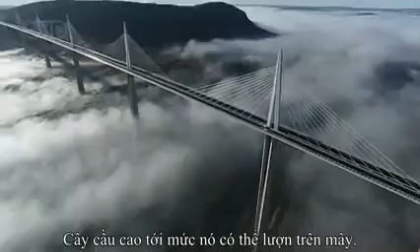This is the Millau Viaduct, the tallest bridge in the world. Its highest tower stretches a staggering 343 meters. So high, the bridge glides above the clouds. But this is a megastructure they said couldn't be built. When I've shown first the drawing of this bridge, they really thought I was crazy.

The team attempting to build this amazing freeway in the sky had to survive landslides, fight winds gusting at 130 kilometers an hour, and weather massive storms as the bridge simply hung in the balance. It's a bridge that pushes the boundaries of engineering to the limits, and then beyond.

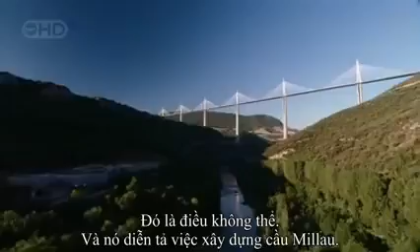Imagine building a series of Eiffel Towers, then slinging a 4-lane highway between them, all the way across one of the deepest valleys in France. Impossible though it sounds, that pretty much describes the building of the Millau Viaduct.

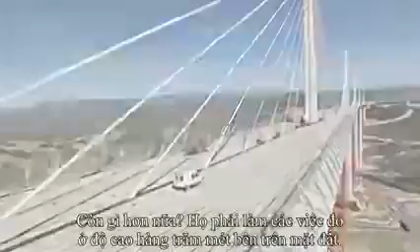From the start, the construction team faced 3 daunting challenges. 1. Build the tallest bridge piers in the world. 2. Put a 36,000-ton freeway on top of them. And 3. Erect 7 steel pylons, each weighing 700 tons. And what's more, they had to do this hundreds of meters above solid ground. So high that if you were on top of the Eiffel Tower, you'd still be looking up at this awesome bridge.

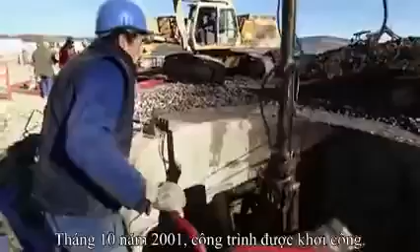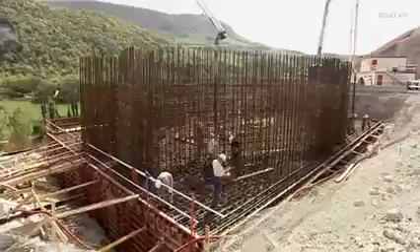October 2001, the team break ground. They're required to build a bridge that'll last for 120 years. And to win the contract, the teams promised to build it in record time, less than 4 years. By comparison, the world's longest suspension bridge, the Akashi Kaikyo in Japan, took a full 10 years to build. To up the ante, any delay will cost them $30,000 a day in penalties.

There are 7 piers that are numbered from the northern end of the valley. Number 1 will pose problems because of the steep slope. Number 2 will be the biggest challenge since it's the tallest. Crossing the river, number 3 is not much shorter. Then 4, 5, 6, and 7 climb the gentler slope to the south.

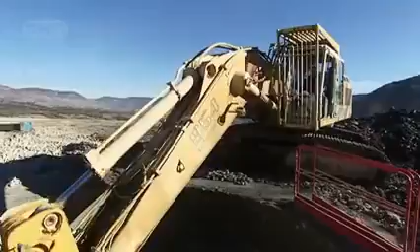To begin, the team had to bury the foundations deep in the bedrock in order to support the enormous weight the bridge will place on them. But the forces of nature were stacked against them. Geologists have warned of the risks posed by the region's fractured limestone. The rock is full of cavities that are essential to the local cheese economy. These cave systems, close to Millau, are home to a unique bacteria responsible for the blue mold in the world-famous Roquefort cheese. But what's perfect for cheese could be disastrous for a megastructure.

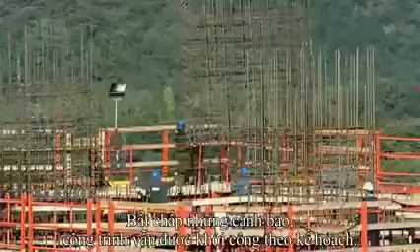The geologist's diagnosis spelt one thing: landslides. This kind of catastrophe could jeopardize the entire project. Despite the warnings, building went ahead as planned. Then, well into construction, as predicted, a dramatic storm causes a landslide. 4,000 cubic meters of rock collapse around Pier 1. Fortunately, the fallen rock doesn't damage the pier, but the warning is clear. They're forced to divert precious manpower and equipment to stabilize the slope and prevent a repeat collapse.

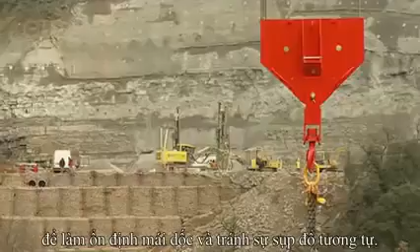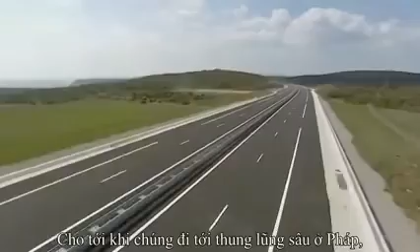So if the area is prone to landslides, why did they build the world's tallest bridge here in the first place? The answer is simple. In the 1980s, France built a freeway linking Paris directly with Spain. This major artery headed south across the French countryside, while from the Mediterranean, the freeway headed north, until they both hit one of the deepest valleys in France and stopped dead. Welcome to Millau, France's least favorite bottleneck.

The town of Millau is in the mountainous region of the Massif Central, one of the most tranquil parts of France. But in summer, this poor medieval town suffered traffic hell. The locals couldn't take it anymore. Neither could their mayor. It was terrible for our reputation. When you hear every day on the television and radio, avoid Millau, there's a traffic backup, a 5-hour wait in Millau.

And it's not just the people of Millau. Two drivers, Jamila and Jemima, crossing the 30-odd kilometers between the freeway on either side of Millau, reveal exactly why this bridge is needed. Jamila, in car 33, will cross the new bridge, while in car 22, Jemima will take the old road across the valley floor.

Getting straight on the freeway, car 33 approaches the Millau Bridge after just 18 minutes. The only delay is the 30 seconds it takes to get through the toll booth. Then driving at 100 kilometers an hour over the spectacular bridge, she takes just 32 minutes to get to the other side. Car 22, meanwhile, is just beginning the crawl through the medieval streets of Millau. Cyclists, pedestrians, people with dogs all need to be negotiated.

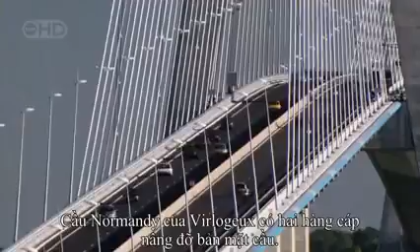Virlogeux's Normandy Bridge has 2 sets of cables supporting the deck. But he wanted to up the stakes for Millau by losing 1 row of cables, so the remaining line would be forced to do twice the work. More dramatically, the 2.5-kilometer Millau Bridge, instead of having a single main span, needed a whole series of piers to support it across the valley. No bridge builders had ever attempted a multiple-span, single-line cable-stay bridge on this scale before.

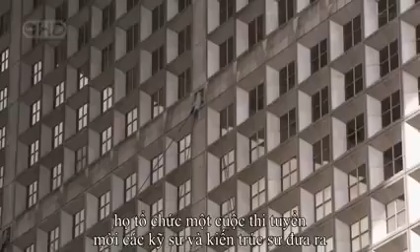The French authorities had a problem. Nervous about Virlogeux's groundbreaking scheme, they held a competition inviting other engineers and architects to compete with different designs. The winner, Lord Norman Foster, is one of the world's superstar architects. In Hong Kong, he built the world's largest airport terminal. In Barcelona, offices literally hang from a mast on his communications tower. This is a man who regularly contemplates the impossible and delivers.

You know, it's the challenges, and it's one challenge on top of another, on top of another. And with Millau, one of the biggest challenges was making it fit into the landscape, given it's just down the road from the famous Gorge du Tarn, France's equivalent of the Grand Canyon. How do you make something which has to be so immensely strong against the forces of nature look very gentle, very delicate? How do you weave something on that scale into the most unbelievable landscape?

Ironically, Foster's answer was to take Virlogeux's pioneering scheme, then push it one stage further. He turned an elegant piece of engineering into a delicate work of art by boldly cutting out 2 of the 9 original piers and seriously slimming down the remaining piers and road deck. Foster wanted the bridge to appear as delicate as a butterfly, but this butterfly has to support the weight of 5 Eiffel Towers in gale-force winds hundreds of meters above the River Tarn. Getting the design wrong would be a disaster.

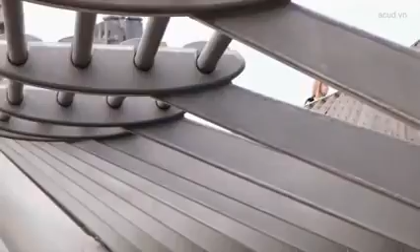Then, with Millau still on the drawing board, Foster's record as a bridge builder suffered a major setback. His Millennium Bridge in London is actually another record-breaking structure, the lowest profile suspension bridge in the world. But when this footbridge opened to the public in June 2000, it was a public relations disaster. Crowds walking over it set up a resonant frequency, and the bridge began to sway. As people adjusted their step to the small initial wobble, the effect was magnified.

Though it didn't threaten the structure, the swinging motion became so dramatic, the authorities closed the bridge for a refit that took 1.5 years and ended up costing over $8 million. It was a bad omen for the Millau Bridge, where construction was soon to begin. And at 15 times the height, a design flaw would be a catastrophe.

December 2001, France's Millau Viaduct, the tallest bridge in the world, is under construction. Everything about this project is supersized. It'll need 200,000 tons of concrete, so much that the team have to build a concrete factory on site. But there's nothing straightforward about this concrete. The formula must be just right.

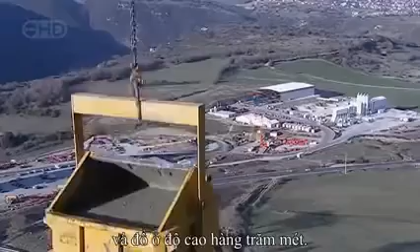It needs structural strength to support the massive loads it'll have to bear. But it can't set too quickly, as it has to be hoisted into position and poured hundreds of meters in the air. And it needs to be just the right color to suit Norman Foster's vision. In fact, the architect's vision has created a headache for the construction team. He's designed each pier as a complicated geometric shape, tapering the entire way up with vertical grooves set into them to create shadows. But what's just a line on paper for the architect was a major challenge to build.

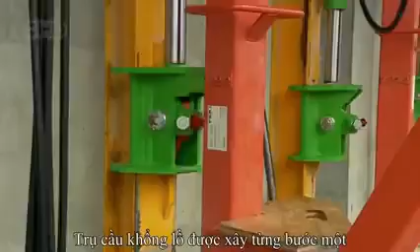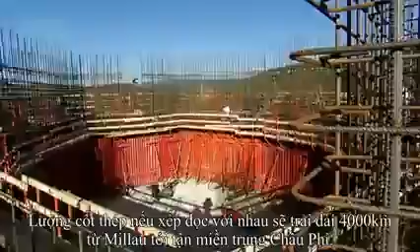The enormous piers are built step by step by pouring concrete into a temporary mold. To give the required strength, the molds are filled with a frame of steel reinforcing bars. In total, 16,000 tons of these steel bars are hoisted into place and secured. Laid end to end, they'd stretch the 4,000 kilometers from Millau all the way to Central Africa.

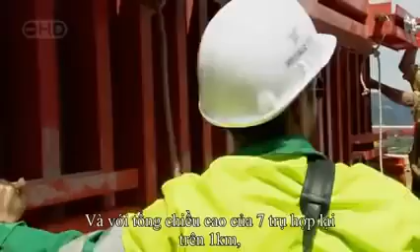The shape of each pier is seriously complicated. As a result, each time they remove the sections of red steel shuttering, they have to change the shape of the mold to fit the profile of the next 4-meter section. Manhandling these steel panels weighing up to 15 tons apiece is no picnic. And with the combined height of the 7 piers totaling well over 1 kilometer, they have to change the shape of the mold over 250 times.

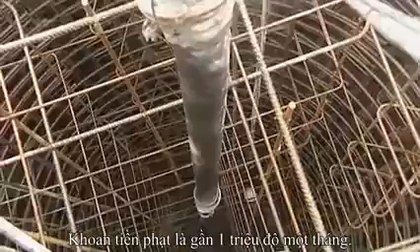Every 3 days, each team on each pier went through this whole cycle. Then they repeated the process. But it was a race against time, with a permanent threat of delay. Keeping the entire build on time and to budget was the daunting responsibility of one man, Jean-Pierre Martin. If instead of 3 days we took 4, imagine that multiplied by the number of castings. We'd end up with a 3 or 6 month delay. With a penalty of nearly $1 million a month, this isn't something Martin wanted to contemplate.

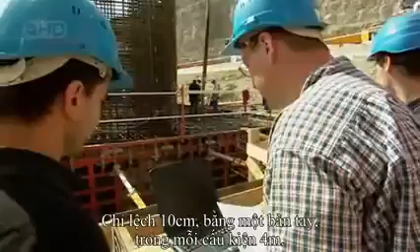And this schedule wasn't his only headache. You have to be pinpoint accurate when you're building the tallest bridge piers in the world. Get it wrong, and the bridge simply won't fit together. Just 10 centimeters out, about a hand's width on each 4-meter section, and the tallest pier could be 6 meters off at the top, the width of a jumbo jet fuselage. Each team was aiming for a specific point in the sky. For Pier 2, this was exactly 245 meters above the ground, 546 meters from the north side, and 1,914 meters from the southern end. There was no room for error.

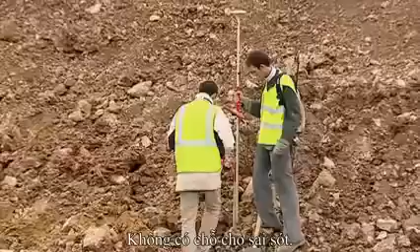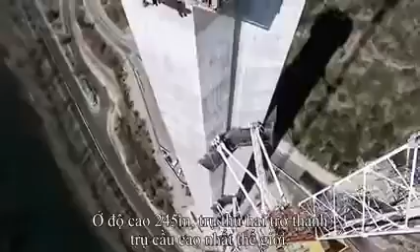The only chance they had to get it right was with GPS, accurate to within 4 millimeters. Using signals from multiple satellites, the team could pinpoint their position and make sure they're on target for that critical point in the sky they needed to hit. Month after month, the piers climbed higher. Finally, by November 2003, they reached their full height. At 245 meters, Pier 2 becomes the highest bridge pier in the world. But is this record-breaking pillar where it's supposed to be? Amazingly, it's dead on target, to within 2 centimeters.

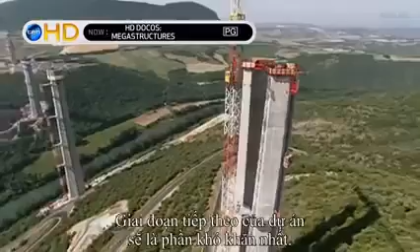Champagne corks pop. It's time for a major celebration. Against all the odds, they were 1 month ahead of schedule, but the team couldn't afford to relax. The next stage of the project would be the most difficult part of the build. Phase 2 of building the world's tallest bridge involved putting a 2.5-kilometer roadway weighing 36,000 tons on top of the piers, a full 270 meters above the River Tarn.

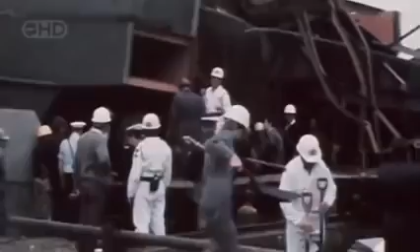Bridge builders know danger comes with the territory, but working at these heights can be lethal. More than 34 died constructing New York's Brooklyn Bridge. 35 died in 1970 on the Westgate Bridge in Melbourne, Australia. And 1 year later, 13 workers were killed when the Koblenz Bridge in Germany collapsed into the Rhine. With these fatalities in mind, the team decided to fabricate the entire road deck on the safety of solid ground. This meant building it in steel, which in theory would be much safer than lifting vast concrete sections hundreds of meters into position.

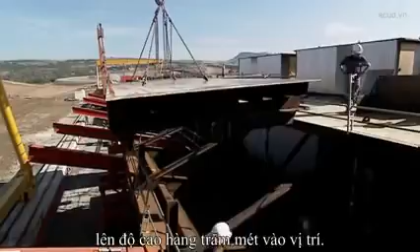There's only one problem with this plan. No one had ever put a road deck on piers anything like this height before, let alone over a 2.5-kilometer span. In the end, only one steel manufacturer had the courage to take on this colossal challenge. Eiffel, the steel firm set up by the great French engineer. Eiffel built what was once the tallest bridge in the world, the Garabit Viaduct in southern France, before getting round to the framing for New York's Statue of Liberty and, of course, his signature tower in Paris.

But despite the company's experience, Eiffel's director, Marc Buonomo, knew he was taking a serious risk. It was a gamble for the company, because if there had been a mistake, if it hadn't worked, it would have been the whole company.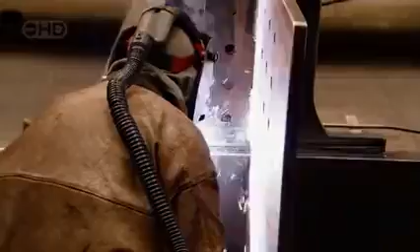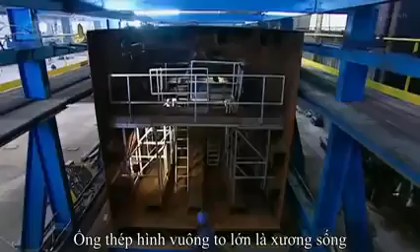They fabricated the massive sections that would make up the road deck in the company's steel factories. This immense jigsaw puzzle involved manufacturing 2,200 separate sections, weighing up to 90 tons and some of them 22 meters long. Their accuracy is measured with a laser to within a fraction of a millimeter. The huge square tubes are the central spine that should make the deck rigid. The triangular side panels will be welded on either side to create the width for a 4-lane highway.

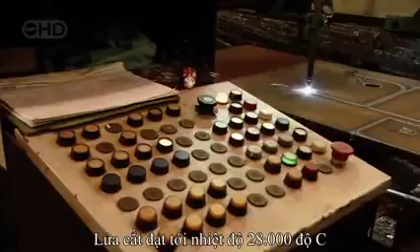To meet the punishing schedule, Buonomo automated the manufacturing with a 2-headed welding robot and a plasma cutting machine. Each cutting pattern or template is programmed into the computer. Then the machine automatically blazes its way through the steel. The torch reaches a scorching 28,000 degrees centigrade. That's 5 times the temperature of the Earth's inner core.

But cutting and welding was the easy part. The hard part was getting these monster sections the hundreds of kilometers from the factories to Millau. The routes had to be planned with precision to avoid major damage. The police coordinated safety and clearances. Even with that level of preparation, some obstacles felt as if they're cutting it just too close for comfort. And this was no one-off event. To build the viaduct took over 2,000 of these extraordinary road convoys.

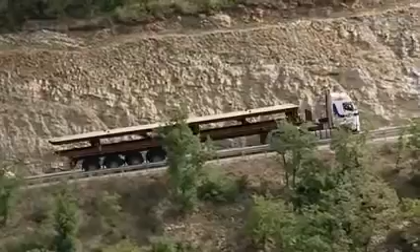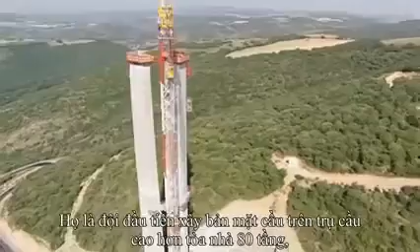The components arrived at assembly plants set up, one on either side of the valley. Here, the pieces of the massive jigsaw puzzle were welded together to form the 2 halves of the deck. But getting these 2 halves to span the valley on top of the world's tallest bridge piers would be a major challenge. They'd be the first team to put a road deck on a pier taller than an 80-story skyscraper.

And pushing bridge building beyond anything attempted before, they planned to slide the entire 2.5-kilometer road deck over in 2 colossal pieces. The bridge's chief engineer, Jean-Marie Cremer, was one of the few people who believed it could be done. All the engineers who know this method, who were in the know, didn't believe it was possible. If the team had got their calculations wrong, the entire structure could collapse into the valley.

We found a solution for the construction, which was to launch the bridge from the 2 sides. One part on the Larzac Plateau, one on the Rouge Plateau. And to push them from the 2 sides and to make them come and meet here above the river Tarn. Smaller bridges use a similar technique. A powerful set of hydraulic rams literally pumps the deck from one side to the other. But Millau would be the longest launch ever attempted over the highest piers in the world, and the results could spell disaster.

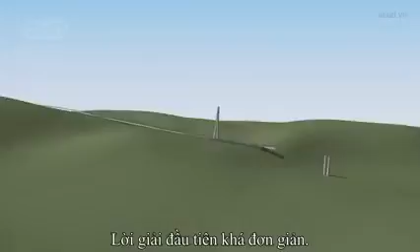The deck is so slender, it would bend and collapse if it were pushed out over the 342-meter spans between each pier. The furthest anyone's previously managed is less than half that distance. The first part of the solution was simple. Fit a pylon so its cables support the front of the deck as it goes out over the valley. Then construct temporary steel support towers that halve the spans to a more manageable 171 meters.

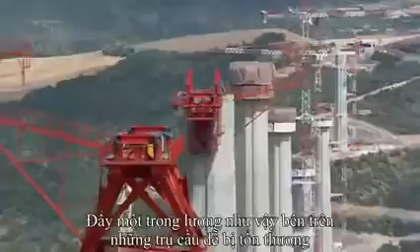These steel towers were a construction feat in themselves. The largest, over 170 meters high, is the tallest ever built, and they needed to carry a massive load: 7,000 tons as the leading edge of the deck, together with the first 90-meter pylon, slide over. And simply pushing this enormous weight over the top of the vulnerable piers would bring them crashing to the ground. This was the nightmare scenario. If we'd done a conventional launch, we would have knocked the piers over like the pins in a bowling alley.

Someone needed to reinvent the way this type of bridge is built. And it's Marc Buonomo with Jean-Marie Cremer who came up with the breakthrough. The basic principle can be demonstrated with a heavy box and a wobbly table.

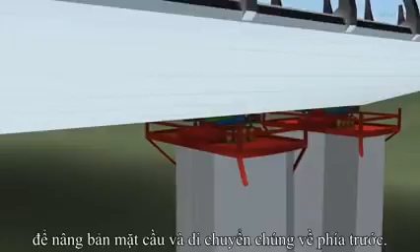The idea is to install a launching system on top of the pier, and that way, if I push the deck, it has no effect on the stability of the piers, and the piers won't fall over. The trick is to use a series of these launching systems to jack up the deck and inch it forward.

Each system uses two wedge-shaped blocks under each side of the deck. The upper wedge is pulled forward by a hydraulic ram. It slides up the slope of the lower wedge at the same time, lifting the deck from its supports and advancing it 600 millimeters. The lower wedge then retracts, dropping the deck onto its supports. The upper wedge returns to its original position, and the whole cycle begins again.

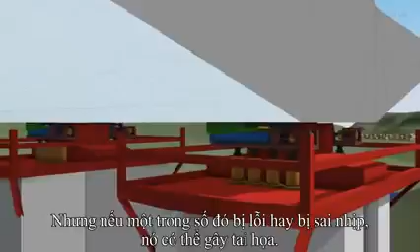4 of these clever devices are placed on each pier, all programmed to work at exactly the same time. The result is that together, they pick up the entire roadway and shunt it forward. But if one fails or gets out of step, it could spell disaster. The force could push the bridge piers apart till they collapse.

When you're up there and you see Millau 300 meters below you, you ask yourself, was this a good idea? The future of the entire project was now hanging on a prototype, and it had never been tested.

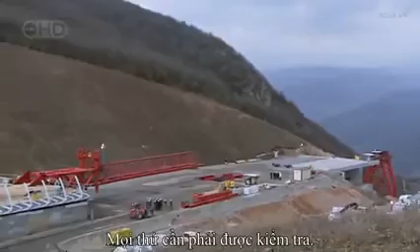It's the morning of February 26, 2003. Do or die day for the world's tallest bridge. Everything is about to be put to the test. The flexibility of the deck, the strength of the temporary piers, and critically, the pioneering hydraulic ram system. Even Buonomo, the man in charge of the launch, had his doubts.

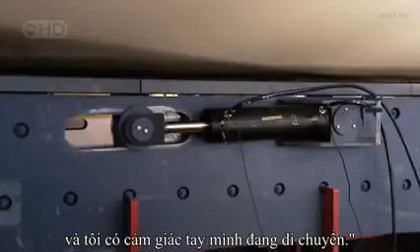The moment I heard the motors start, I put my finger on the deck, and I could feel my finger move. Every 4 minutes, the deck advanced 600 millimeters across the valley. Surveyors tracked its progress. But it was still a nail-biting time as they watched the unsupported deck crossing the void.

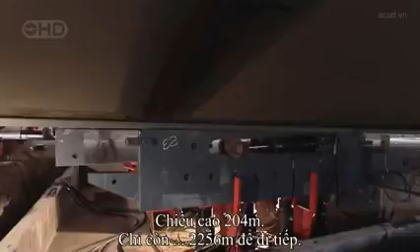Eventually, the deck reached the safety of the first pier. 204 meters down, only 2,256 to go. The launching system seemed to be working as planned. The engineers were feeling optimistic. But as the deck advances into space, it'll become more vulnerable to the wind, which can reach 130 kilometers an hour.

Unfortunately, the road deck has the shape of an upside-down airplane wing, and the team's greatest fear is that this wing could simply take off. The engineers kept a close eye on the wind and weather conditions. When they were satisfied there was a 3-day weather window and the wind wouldn't exceed 85 kilometers an hour, they'd give the construction team the go-ahead, and the deck launch could continue.

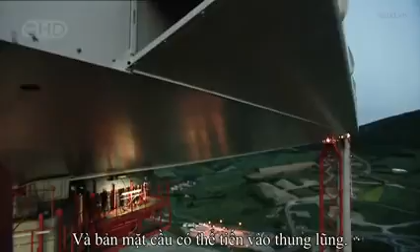The reason for this precaution is simple. Strong winds can literally tear a bridge apart. In 1940, Washington State built a suspension bridge across the Tacoma Narrows in the US Northwest. It opened with a grand ceremony on July the 1st. But the celebrations were short-lived. The bridge had a major problem: the wind.

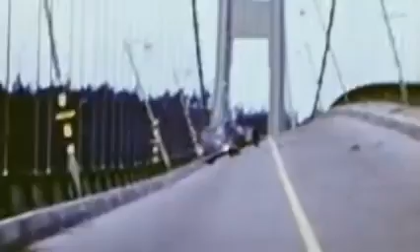Girders beneath the deck, designed to make the bridge rigid, actually blocked the wind, causing the roadway to ripple alarmingly. Locals soon dubbed it Galloping Gertie. On the 7th of November, with the wind less than 70 kilometers an hour, the bridge begins to twist violently. At 11 a.m., time runs out for Galloping Gertie. The wind sends the bridge crashing into the river.

Wind tunnel testing is now standard procedure as a direct result of Galloping Gertie. For the Millau Bridge, they analysed the wind in the Tarn Valley over 18 months, then recreated those conditions in the wind tunnel. Wind engineer Olivier Flamand was shocked by the results. The average wind speed was relatively low, but because there's such strong turbulence, it created very fast peak winds.

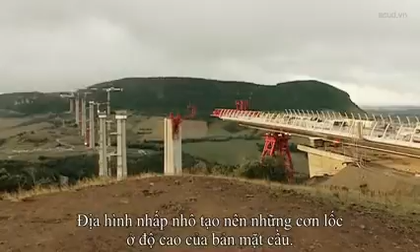The rugged terrain creates serious turbulence at the height of the road deck. Winds peak at 130 kilometers per hour. That's hurricane force. They tested every aspect of the bridge to analyze the risks: piers, pylons, and critically the deck. But it's not just the aerodynamics of the finished bridge. They needed to find out how it would behave when it was most at risk, during the launching of the deck.

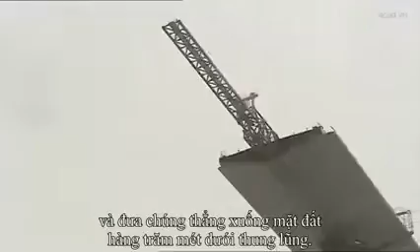Olivier and his team reached a chilling conclusion. The winds they've measured are strong enough to blow the unsecured deck off its supports and send it crashing hundreds of feet to the valley floor. And then the nightmare began. On the 22nd of August 2003, 6 months into the deck launch, one of the launch systems failed, leaving the deck hanging in the wind. To make matters worse, the weathermen were predicting storms.

So far, these massive pumping machines had worked perfectly. But the fact is they were prototypes, and due to the frantic schedule, they'd never been tested. The problem was that the non-stick Teflon between the sliding surfaces had ripped, and the friction generated was too much for the hydraulic rams to push against. Unfortunately, no one had planned on replacing parts of this monster machine mid-launch on the top of a massive concrete pillar. This was very bad news for the man who staked his reputation on this system.

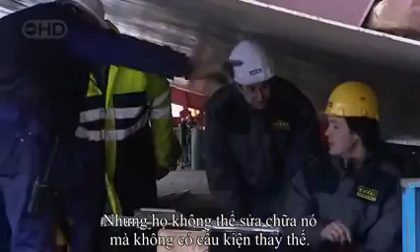Re-examining their calculations, they realized the cause of the problem. They'd underestimated the forces between sliding surfaces, but they wouldn't be able to repair it without the necessary spare parts. The clock was ticking, and Marc Buonomo needed a solution fast. When Apollo 13 came back with that incident, the NASA engineers requested they did the inventory of everything there was on board to know how to fix it.

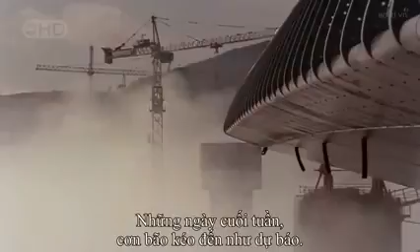That weekend, the predicted storms arrived, and another set of launching machines wore out. So when the deck finally made it to the safety of the next pier, the team breathed a major sigh of relief. You don't forget that. I won't forget that for 4 hours I was really scared.

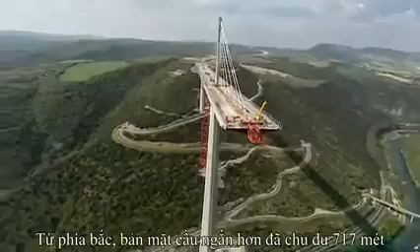The two decks continued their journey across the valley. Day after day, week after week for a full 14 months, they approached each other, millimeter by millimeter. By May 2004, they'd reached a critical phase. From the northern end, the shorter deck had traveled 717 meters into space to reach its final resting place. From the south, the longer deck extended over 1.5 kilometers. Only the section over the river, the one point where it was impossible to erect a temporary pier, divided them.

But would they meet as planned? If they've got their calculations wrong, they'll have built the biggest white elephant in Europe. Even the man behind the whole project had his doubts. I was not convinced at all that the two parts of the deck could meet exactly with a perfect geometry. The odds were against them. Calculating such a feat so precisely is a Herculean task.

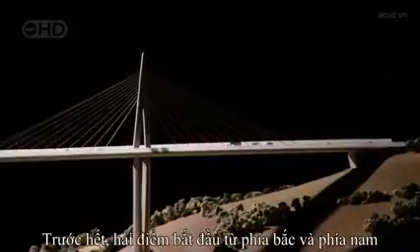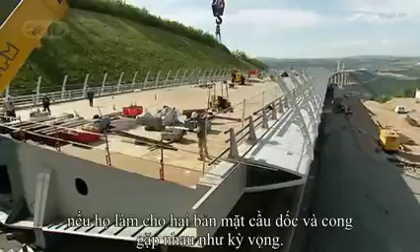Firstly, the two starting points on the northern and southern slopes of the valley are at different heights. Secondly, the bridge has a subtle curve to it. As a result, each steel panel which makes up the road deck had to be cut and welded with extreme precision. It would be an engineering triumph if they got these two sloping curved decks to meet as required. The team checked the weather reports. With the wind inside safety limits, they gave the go-ahead for the final push.

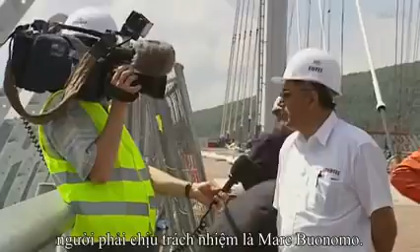The rams began to drive the deck's leading edge off the safety of Pier 3 towards its destination. At this point, a total of 21 launching systems needed to move at exactly the same moment to avoid disaster. If anything were to go wrong now, the man responsible would be Marc Buonomo. Everyone asked me, how can you be sure that it will go straight? So to be sure that they were going to the right place, I had a GPS put on the front, so I could see the gap between the theoretical and the real position.

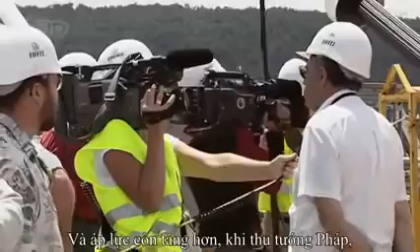Over the next 2 days and nights, the deck advances 600 millimeters at a time towards its final resting place. The world's media are watching the critical meeting of the decks, and to add to the pressure, the French Prime Minister is due to drop in to celebrate the event. The deck pushes forward. Now, with only centimeters separating the two sections, a magnum of champagne is hung between them to mark the moment.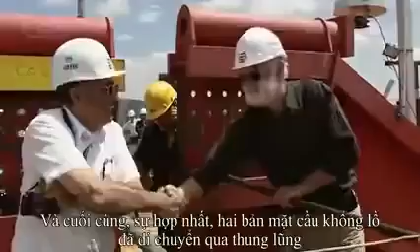At last, union. The two massive steel decks have traveled high over this valley, a total of 2.5 kilometers, and when they check, they're aligned to within 1 centimeter. That's accurate to within 99.9999%. All the measuring, all the calculations have paid off. They've nailed it.

The meeting of the decks was a special moment. News reports traveled round the world, and in Salzburg, Austria, they reached Felix Baumgartner, aka Felix the Conqueror. Felix has made a career base jumping from some of the tallest structures on the planet, and within 24 hours, he'd driven to Millau and was calculating the logistics for the jump, factoring in his two main aims, to avoid arrest and death.

Baumgartner waited for darkness before arriving on site. He found his way to the base of Pier 2, then climbed an access ladder the full 245 meters to the top. He entered the steel road deck and found a place to hide until daybreak. He had to remain concealed until the sun was high enough for his cameramen to record his world record attempt.

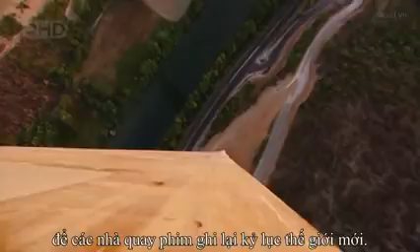At 7 a.m. the following morning, Felix the Conqueror emerged. He took a cool backward flip off the tallest bridge in the world and entered the record books. The tallest bridge in the world, 250 meters. I did it. And having evaded death, he made sure he's not caught by the police.

The decks have been joined, and the team have reached the final phase of the project. But there was still a race to meet the schedule, and their problems weren't over yet. Everyone could see the dramatic undulations in the flexible steel deck. Even some hardened bridge builders wondered about its structural integrity. It was a huge surprise for everyone. All the engineers said, we knew steel was flexible, but not that flexible.

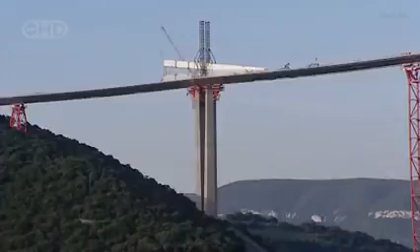The team were relying on the pylons and cables to pull the deck straight. Each massive pylon is 90 meters high and weighs 700 tons, the equivalent of 85 London buses. Placing them in position on the slender deck, high above the valley floor, would go beyond anything ever attempted. Once again, Marc Buonomo had a plan. You know, the first people to make vertical pylons were the Egyptians. Buonomo adapted a technique used in ancient Egypt to erect obelisks in the sands.

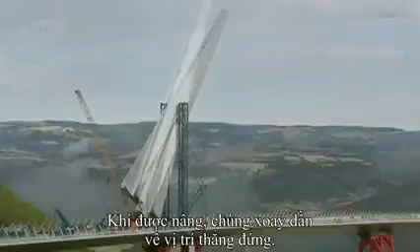On top of the road deck, the team put up two enormous steel towers, both of them secured by cables and equipped with a hydraulic system capable of raising 1,000 tons. The 700-ton pylon is then lifted by the hydraulics. As it rises, it pivots little by little until it's vertical. It's then lowered safely onto its anchorage point. Buonomo's 4,000-year-old technique worked to perfection.

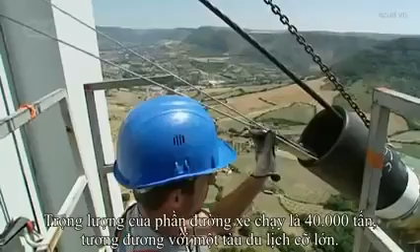With all 7 pylons in place, the team could attach the cable stays that would straighten the rippling deck and give it the strength to cope with full traffic loads. They hope. The weight of the roadway is now over 40,000 tons, the equivalent of a cruise ship, and the 154 cable stays should prevent it from sagging or collapsing. The strongest stays are made up of 91 individual steel strands and have a breaking strength of 25,000 tons, strong enough to hold back 25 jumbo jets, all at full throttle.

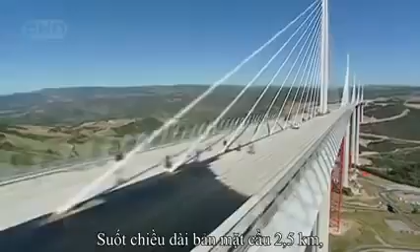As the cable stays are tensioned, true to plan, the ripples in the road deck are pulled straight. Over the 2.5-kilometer deck, the ripples are now no larger than the size of a thumb. They're finally on the home straight. The road surface goes on, adding a further 10,000 tons to the load. That's like driving 153 battle tanks onto the deck. But before it could open to the public, the team needed to know the bridge is safe. It would have to pass one crucial test.

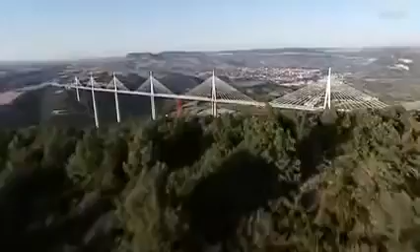After 3 years, the construction team building France's Millau Viaduct, the world's tallest bridge, are about to find out if they got their calculations right. On a single-span cable stay bridge like the Normandy Bridge, a large load on the main section is no problem because the cables are attached to solid ground and can't give.

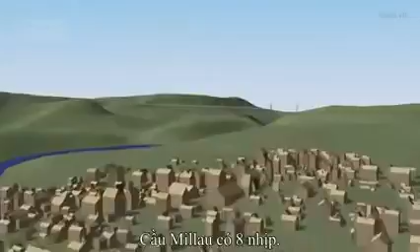On the Millau Viaduct, with its 8 spans, the cables are attached to the deck of the adjacent sections. A load on one section will cause it to drop, pulling the stays down. As the pylons lean in, the matching stays are pulled upwards, lifting the neighboring decks and causing a dangerous rippling effect.

It's right now the team put their bridge to the test. These 28 trucks have a combined weight of over 900 tons. They are now positioned in the critical point, mid-span. The engineers hold their breath. Measurements are taken. The span bends just 26 centimeters. This is a triumph for the engineers. The bridge was designed to cope with more than double that.

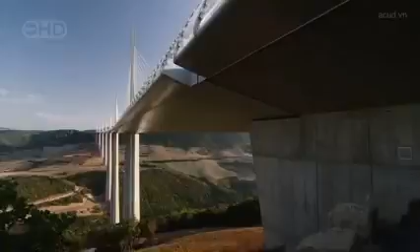4 weeks later, on December the 14th, 2004, President Jacques Chirac officially opened the Millau Bridge. A proud moment for the whole of France. Just over 3 years of construction have produced the tallest bridge in the world, designed to last at least 120 years. And against the odds, the project manager even brought the job in on time. But that's not what he's most proud about. What I remember, because on construction sites there are often accidents, is that we had no serious accidents, nothing more than a minor injury.

As soon as it opened to the public, the bridge was an instant success. But the real test isn't till its first summer, when the French all take their annual vacation. No one ever expected anything like this. Numbers peaked at more than 50,000 vehicles a day. At over $7 per car, that's great news for the construction company, who are clawing back their $478 million investment in the project.

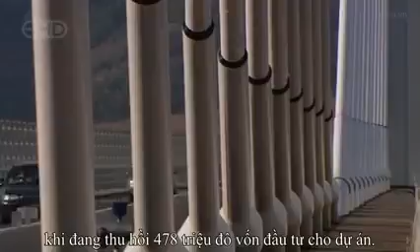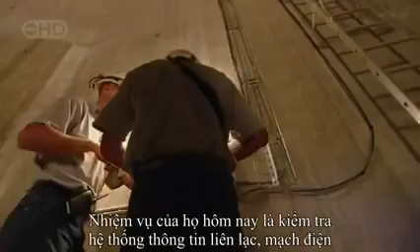This was an epic bridge to build, but it's just as epic to maintain. Thierry and Frank are assigned to P2, the world's tallest bridge pier. This structure is no solid concrete block. It's a series of vast hollow spaces. Their job today is to test the communication system and electric circuits on each of the 7 structural floors. This involves a 343-meter climb, going hand over hand up a ladder for the rest of the day. By dusk, when Thierry finally reaches the summit of the pylon, he may be exhausted, but there is a payoff. You get a fantastic view from here, a 360-degree panorama.

The tallest bridge in the world has become an icon. But this is creating problems no one had ever imagined. Locals have been taking over the bridge as a platform to get media attention for their causes. This crowd was hoping that driving sheep over this freeway in the sky would help them get more farming subsidies. Jose's job is to prevent this kind of incident from creating a danger, and on this bridge, the incidents keep on happening. An alarm triggered by a motion detection system means there's a stopped vehicle on the bridge. Immediately, Jose dispatches a colleague to deal with the situation. The last thing anyone wants is a multi-car pile-up on a 2.5-kilometer bridge, quarter of a kilometer in the sky.

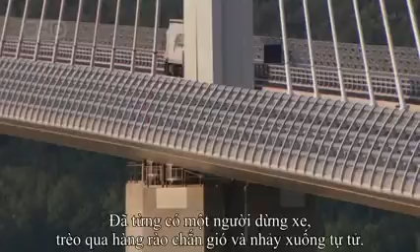Jose zooms in his camera to reveal the man has left his car and is sitting dangerously on the crash barrier. The driver's probably only broken down, but already one man who stopped climbed over the wind barrier and jumped to his death. Bruno intervenes. Thankfully, it's no more than an irresponsible photographer who's sent on his way.

You could say the Millau Bridge is a victim of its own success. It's definitely become a major tourist destination. 700,000 visitors in the first 9 months. Fortunately, most of them wait till they're off the bridge to take their photos. It's magnificent. I came 600 kilometers today to see the Millau Viaduct. There's only one thing to say. It's extraordinary. They're drawn because it's a world-beating structure, but also because it's incredibly beautiful, delicate and minimal. Not what you'd expect from a structure that's nearly a third taller than any other bridge on the planet.

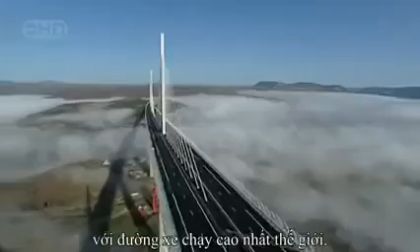And architect Lord Norman Foster's achieved his aim to give the driver the sensation of soaring. As you leave these plateaus, you do fly. You fly across this bridge. Literally, you are above the clouds. And the result certainly pleases the man who dreamt it all up. To see erected this bridge, which I imagined 15 years ago, it's something magic. This is the longest pure cable stay bridge in the world, the tallest roadway in the world, and of course, at 343 meters, it is the tallest bridge ever constructed.